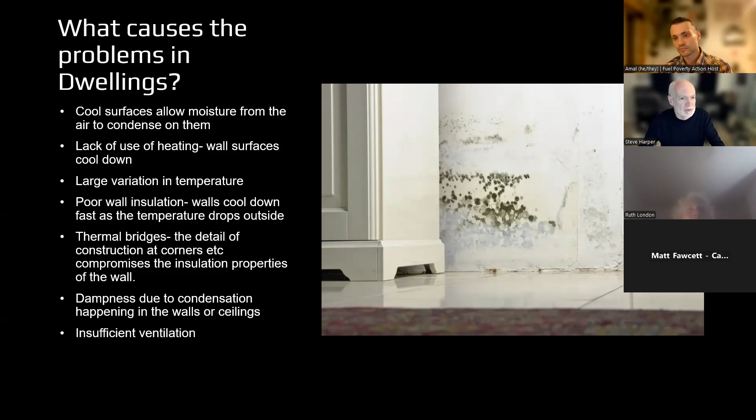So next slide, please. Oh, sorry. Yeah, I'm waiting for my version of the slides to go. Could you go back? Yeah, that's fine.

Yeah. So as we just touched on, the daily purge ventilation. Purge ventilation is really when you've created a large moisture load in the room by cooking, from occupants, or particularly from showering and bathing. Just after you've created all of that moisture, the best thing you can do really is to open the window for 5 minutes in that particular room, probably with the door closed to that room.

Try and ventilate and remove the moisture from the room in the first place. Whenever your property cools down later overnight, if you're even heating it more than 16 degrees, and a lot of people don't because they can't afford it, it will invariably cool down further. And the problem is that if there's moisture, from the cooking and bathing and even humans breathing out, all of that is building up in the property. Walls cool down overnight as the temperature drops, and then boom, all of that condensation is going to form on your walls. So you really want to have this sort of purge ventilation idea.

So, as I said in the note here, the Germans are keen on doing this, and they do it twice a day for 5 or 10 minutes. They call this lüften, which means to air. And in the UK, it's called house burping, apparently. I don't know who came up with that. So basically, the idea is to remove the problem moisture load and problem smells and so on, just to get fresh air into the property.

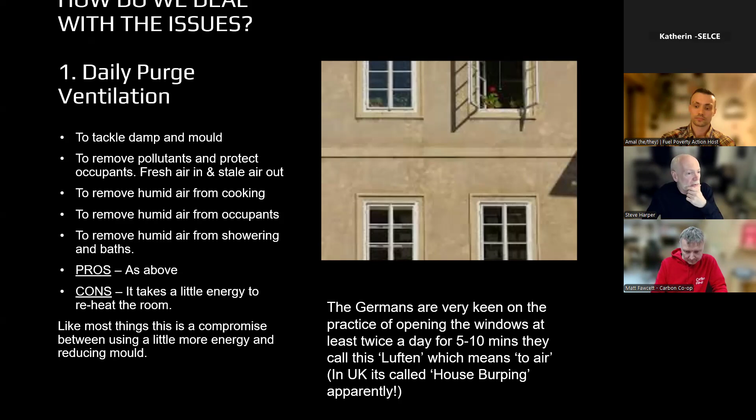So, very quickly then, through a series of things. Most of these are well known to people, so I won't elaborate too much. But in my house, we've actually done all of the things in this list on the left. We use door draft stoppers. We use draft-proofing tape on internal doors, and foam tape on windows externally. I use tape to tape up the windows that I'm not going to open over the winter, because our windows are cast iron and the wind just rushes through there and we lose loads of heat.

So it is worth looking around your property at all of these things in this diagram and see if any of those you've got can be closed off. At the bottom, we fitted these escutcheons to keyholes because with all of the keyholes, obviously with the wind pressure, the wind just rushes through those keyholes.

And it's surprising, you add a few of those up and you've suddenly got a 6-inch hole in the wall, you know? And that's why, in our heads, we don't really consider that strip underneath the door. If you compress that all together in one square, it's probably a 3-inch square. And if we saw a 3-inch square in the wall, we would be very quick to put something over the top of it to block it, you know?

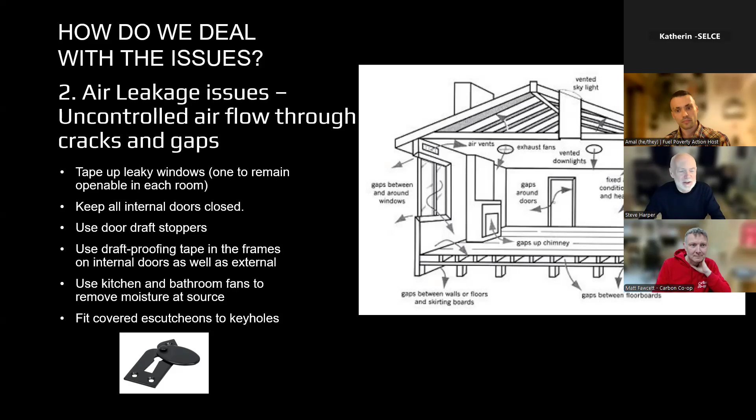So as I said, damp issues are much more likely when the room temperature is below 18 degrees centigrade. We can't get away from that. The ideal humidity levels for rooms, yes, 40 to 50. Bedroom, 30 to 50. Well, my study here, because of the air leaking in from outside, which dehumidifies, can get as low as 30% relative humidity. When the humidity goes as low as 30, you get static shocks off everything. Your jumper builds up static, and your eyes dry out very much.

And because I'm using the computer and I'm not blinking enough, my eyes tend to dry out. At 30% humidity, as opposed to something like 45 or 50, it's not an issue at 45 to 50 humidity, but at 30% humidity, it is. So for a lot of people with rooms heated to 18 degrees C, the humidity should kind of look after itself.

In some stately homes and historic buildings, we used to control the heating by turning it on at 16 degrees, or if the humidity went over 50% humidity, we used to actually turn the radiators on as well, and that was to stop the tapestries and all the things you normally see in National Trust properties from drying out and falling apart.

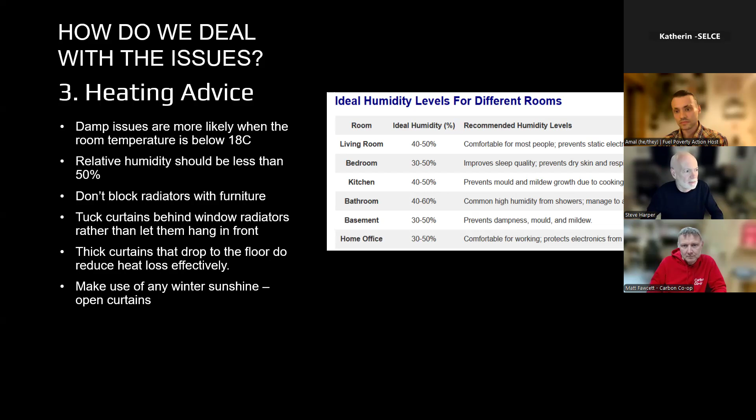So next slide, please.

I'm not going to dwell on this because I'm running a bit over time, but there are lots of controls available. And the very annoying thing is that some of the products you have in your house, like a boiler, have more enhanced energy saving features like weather compensation. So basically, it turns down the flow temperature of the boiler as it gets warmer outside and vice versa. When it's colder outside, the boiler sets itself a higher flow temperature.

But there's so many things that come into play here. It's very difficult to say, without looking at a specific property with specific kit, whether or not some of these things can be implemented. And if you've got a need to save energy across the board, the advice that's normally given is turning your boiler stat right down, to like 50 or so. If you've got a condensing boiler, when the stat's at 70 or below, and you've got a 20 degree C delta T across the system, that brings it into its condensing mode, which is where we get the much higher efficiencies out of a boiler.

But all of this is not really the kind of thing people can just go and look up on the internet or in the manufacturer's instructions. The menus to program weather compensation are on your boiler, but it's an impenetrable long list of guidance about how to go about it. So without a bit of knowledge, it's really difficult. And a lot of plumbers wouldn't have a clue how to set those controls on a boiler. This is one of the problems in my industry, frankly.

I do massive heat schemes, thousands and thousands of kilowatts, but people just walk in, switch it on, and walk away. They don't care whether it operates efficiently or not. So our houses are a bit the same. If we can't get somebody to help us with that, we're going to be operating slightly less efficiently than we really should be.

So you probably all got a lot of these things already, but getting one of these little thermometers that shows you humidity as well as temperature, just so you can track where you are, and especially if you're older, if you can keep your property heading towards 18 degrees centigrade rather than 16. But this is the position people are in. I've heard a lot of anecdotes and stories about how difficult it is for everybody to keep their properties or afford to heat their properties to 16 degrees even, and wearing a few coats and things.

The other thing is if you've got little electric heaters, you can put a plug-in kilowatt hour electricity meter. These are about £10 and it tells you how much you're consuming, how much that is. You can even get it in kilowatt hours on that and then multiply it by the cost of pence of electricity if you're into that kind of level of detail.

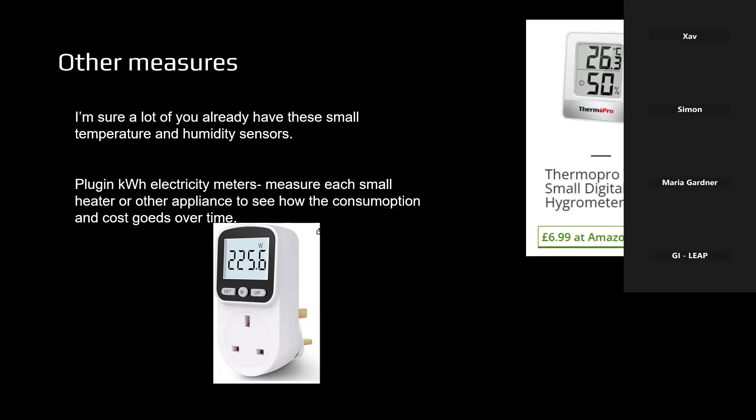But this is part of the problem, is that the vast majority of people are not used to reading the manual on these relatively complex bits of kit, or doing those calculations about cost and kilowatt hour. It's not something everybody's aware of, really. Very frustrating that these things are all available there, but not easy for people to implement them themselves.

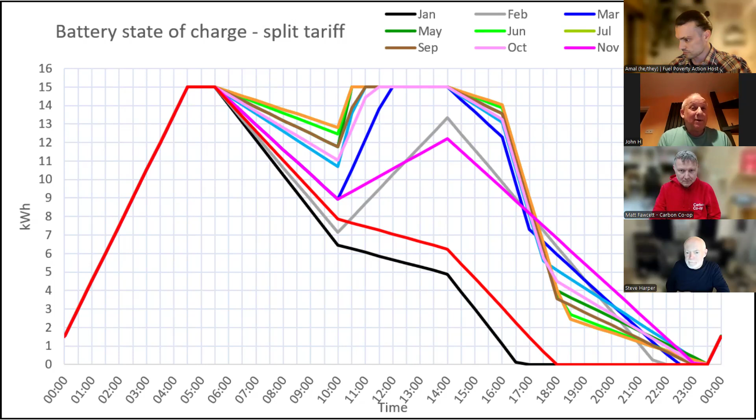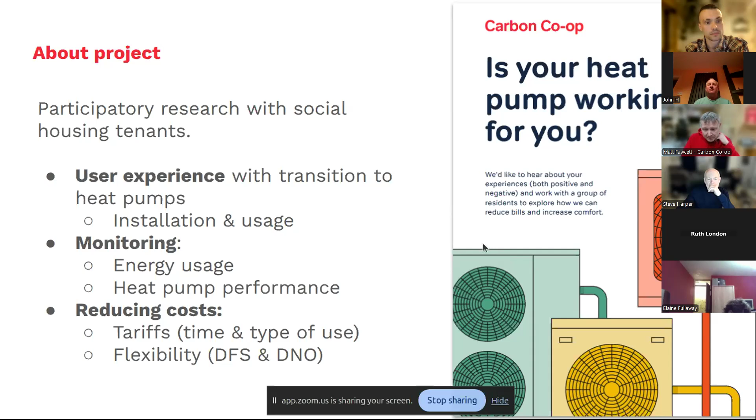I should have checked. Can you see these slides? All right, great. That's fantastic.

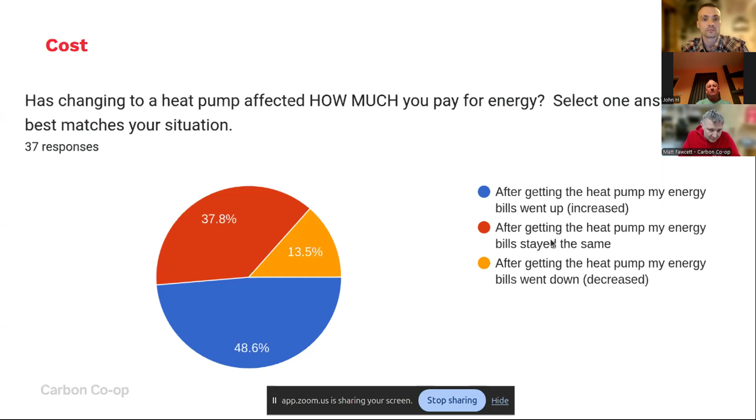So this was a survey that we did with social housing tenants. And you'll see, like, it's great. We had over a third saying that their energy bills had stayed the same since having the heat pump installed, but we had around about half saying that their energy bills had increased. So obviously there is some concern there. So it's worth saying, as John has said, that heat pumps are really amazingly efficient. They do a much better job than old gas boilers did.

But the problem is at the moment that it costs you about 4 times as much for a kilowatt of electricity as it costs for a kilowatt of gas. So what we're really aiming for is around about 350% efficiency on a standard heat pump, in order for it to be comparable with a gas boiler, and this is within a social housing context.

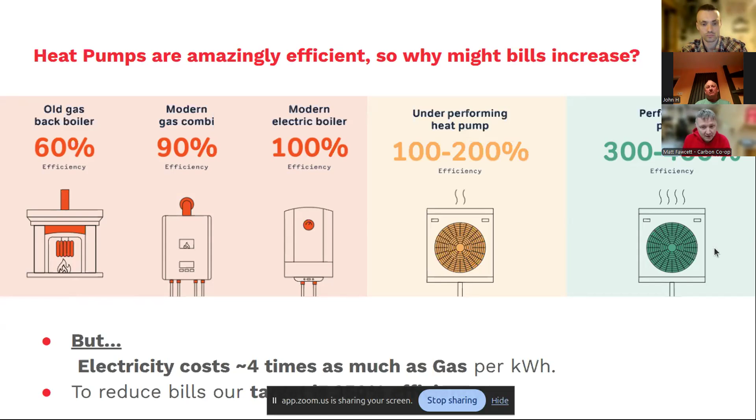So we should say that lots of the systems we looked at, there were improvements in insulation and things like that done at the same time, covering much of the stuff that Steve talked about earlier. So it's important to look at how we're doing generally at meeting this target. So we know that there are some extremely efficient heat pumps out there, heat pumps that live in people's homes, that are 500% efficient, which is incredible.

So there's a site called heatpumpmonitor.org, which is a place where people share the live usage graphs of their heat pumps. It's a resource well worth looking at, and these are sort of enthusiast users, really. And there are people with some incredibly low bills or negative bills on there, often through really smart use of time of use tariffs.

They're normally people who've done lots of research before they make that investment, and they improve the efficiency through trial and error. Now, the sort of national average picture is a little bit less rosy.

So the Electrification of Heat study, which published at the end of last year, was a national study looking at heat pump efficiency. And there were some really high performing heat pumps in there, but there were also some very poorly performing ones. And many of those are systems that were installed under ECO schemes. The average of all of those installations was about 280% efficient. So there were quite a few people there who were potentially paying more for their energy than they were doing previously.

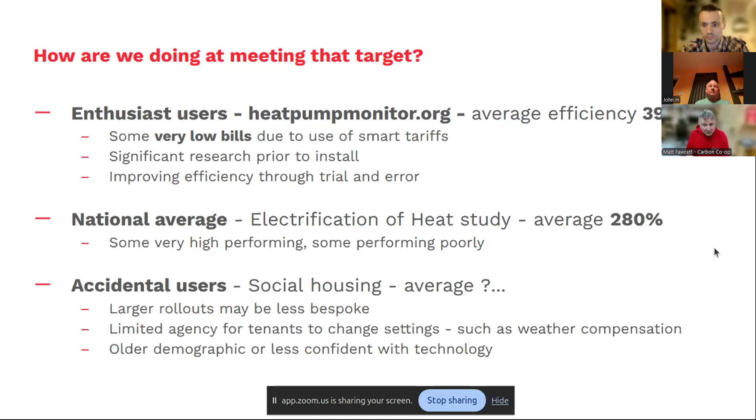Sometimes tenants don't have the same agency as private householders to change things like weather compensation, because they've got more limited access to the controls, and often it's an older demographic, or it's people who are less confident with that technology.

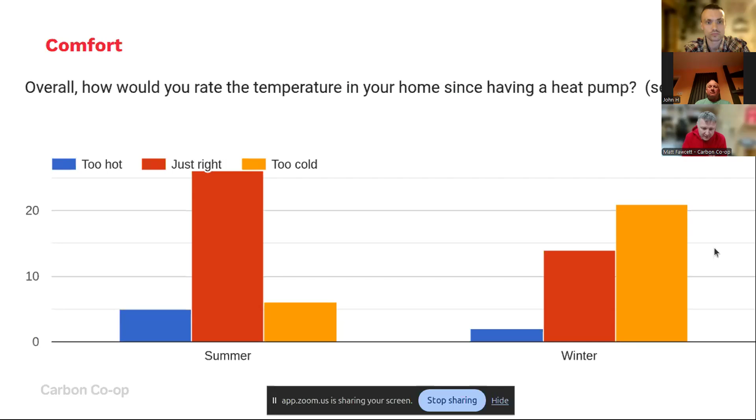So we also asked householders how their comfort had changed since having a heat pump, and we found that a lot of people have problems around cold in the winter, and we think this is largely because heat pumps work really well when you run them low and long. So you run them at a low flow temperature, as John alluded to, and you run them pretty much all the time. But for people who've experienced fuel poverty, that can be quite challenging.

Heat pumps are not as responsive if you use intermittent heating, if you're used to gas where you turn it on and it heats up very quickly. So we found a lot of people were using portable heaters, which are obviously much less efficient than their previous gas boiler. So there is a fear of excessive costs, really. Part of that, I think, is related to when a heat pump is initially installed. There is a period where the heating's been off, and the initial cost of getting a house up to temperature might be quite high.

So there is a bit of work to do around supporting people through that period and giving them the confidence that, despite the initial cost of heating the house up, if you keep the house at that temperature, then those costs will reduce. They also raised a lack of familiarity from support staff and maintenance teams, and a complexity around the user interface and the lack of guidance.

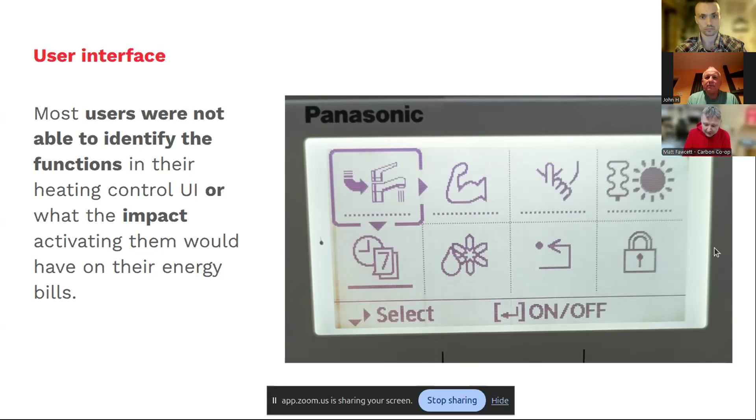So to look at one of those, there's the little quiet symbol there, and if you put that on, then it will limit your fan speed, which means that your heat pump is limited in the amount of heat it can provide to your house. So there were people who had put this on by accident, and then they were having trouble heating their homes. So what I'm keen to say is what we can do to improve the experience for all.

A key thing is to carry on campaigning on the stuff which Fuel Poverty Action is campaigning on already around fuel pricing. There needs to be a readjustment of the balance between gas and electricity, unpegging electricity costs from gas price. The smart meter rollout needs a shake-up so that smarter tariffs are available to all customers, particularly prepayment customers.

A lot of the users that we spoke to have had issues around gas standing charges. So they've had their gas heating removed. Some of them are still using gas cooking, but many of them are just paying gas standing charge with no gas usage because they've been told by their energy company that they can't have their gas meter removed, or they've been quoted several hundred pounds to remove that.

So obviously that needs to change to stop people paying these ever-increasing standing charges, particularly for services that they're not using. So for anyone who is living or working in social housing or advising social housing tenants, it's really important to ask the difficult questions.